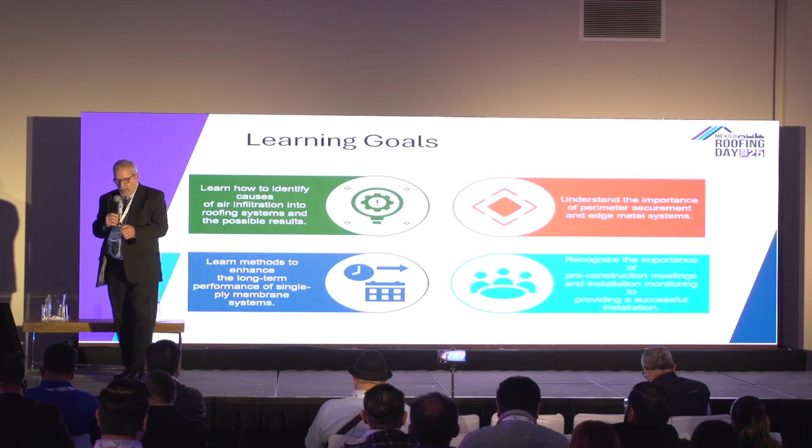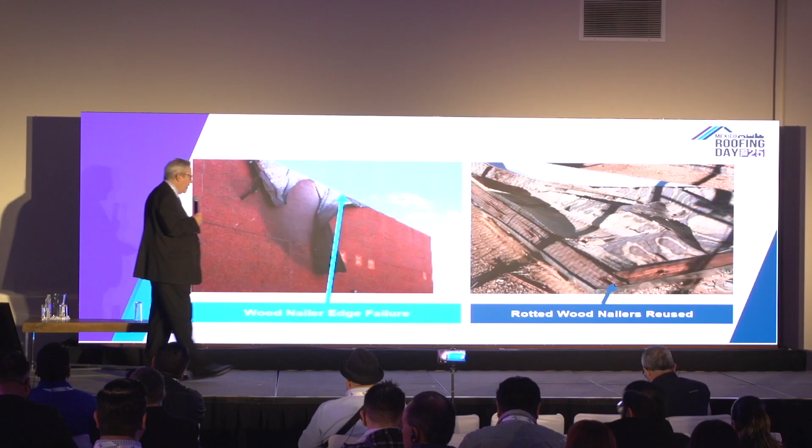Now, a lot of this stuff has already been talked about, but one of the things that actually keeps metalwork in place is the wood nailers, the ones we secure around the perimeter edge to make sure we don't end up having these kinds of issues.

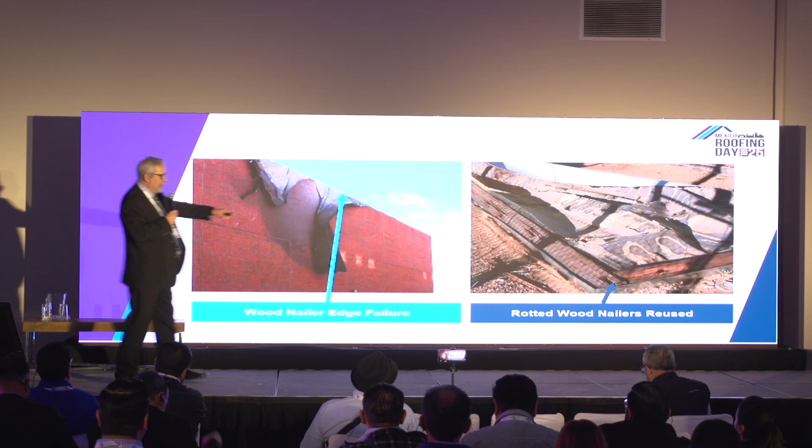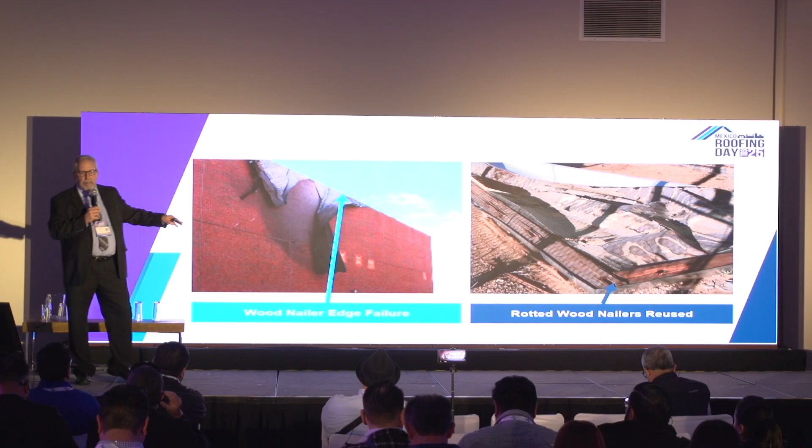They have to be investigated, especially in re-roof type applications. If the wood is rotted and has problems, it's not going to stay in place. If we reuse it, it has to be replaced with new to extend that durability. And the last thing we want is to have our roofing material look like a banner on the side of a building, waving in the wind to the customers and the people that go by. It doesn't tell a good story at all.

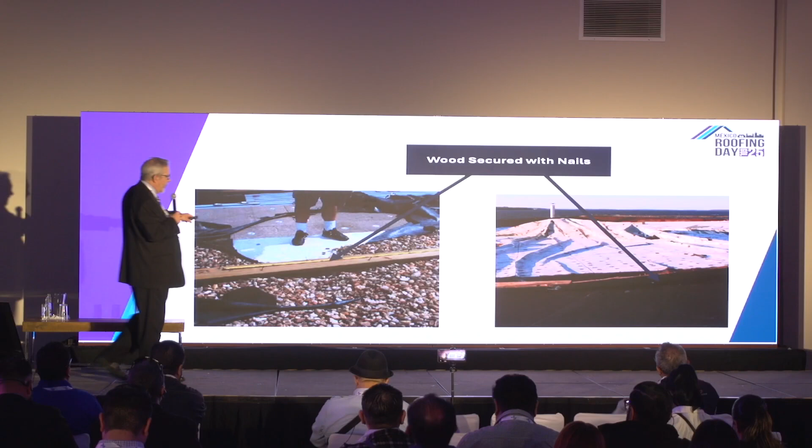There's some stuff like using nails instead of screws, and that's bad. Because nails go in really nicely, they go in straight, they go in fast. Unfortunately, it doesn't take a lot of work or effort to make those nails come back out—they come out just as easily. So when securing wood nailers, we need to make sure we're using screws to keep them tightly in place to withstand the wind resistance.

There's a document that's out there, and a lot of standards that can be used. This one is from FM—the Factory Mutual Property Loss Prevention Data Sheet 1-49. It gives directions on how to install wood nailers to make sure they stay in place for wind resistance, giving long-term durability. Right now in the industry, this is the strongest one being used. There are a couple of other ones that are minorly understood, but this is the primary one.

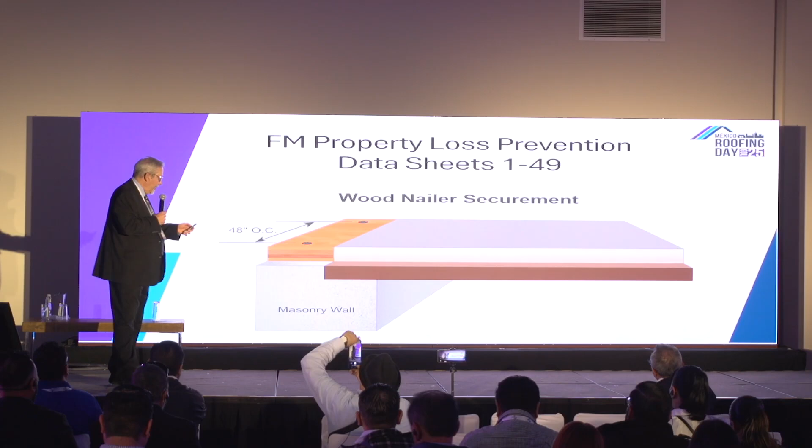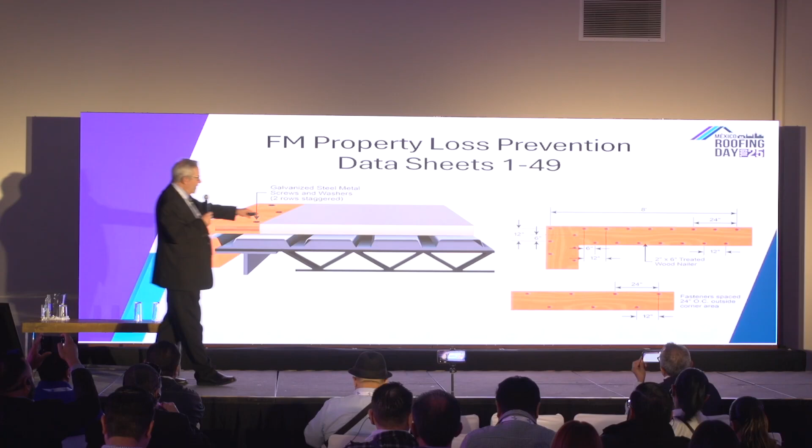This is for steel deck application. We're looking for 2 rows of fasteners staggered at 24 inches on center. But as we've discussed already in a couple of other presentations, wind resistance has different areas on a roof, such as the field, the perimeter, and the corners. So as fastening gets closer to the corners, they double the fasteners to compensate for the additional pressure in those corners to make sure they resist the wind.

So these are some of the things to keep in mind. Review the existing conditions, specify screws, and try to follow FM 1-49, or talk with your manufacturer or your consultant to make sure these are all correctly followed properly. Then the metal edging goes on.

Back in the US, we're finding that a building roof system costs about 10% of the whole building structure. And out of that 10% cost, only 1% of it is actually the metal edging that holds the roof system in place.

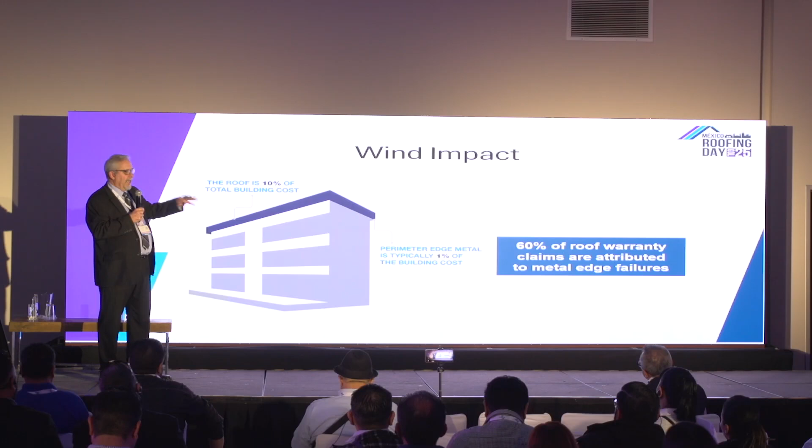60% of the litigations we have, and 60% of the warranty problems we have, is associated with wind and associated with the metal edging. So this is one of the biggest performance issues with roof systems, and it needs to be addressed to make sure it's installed correctly.

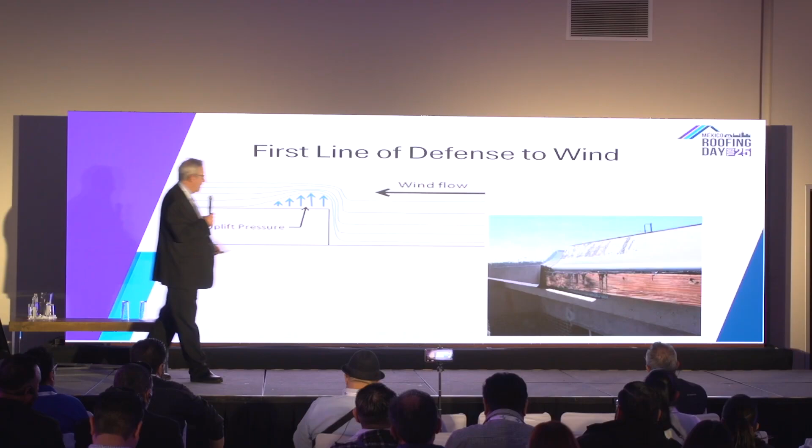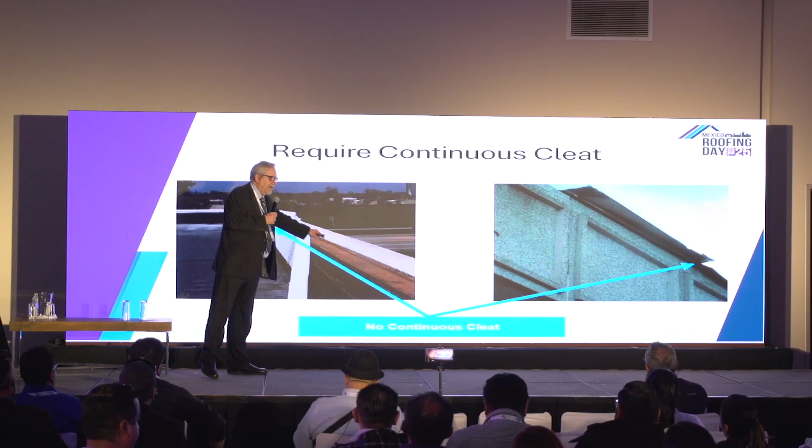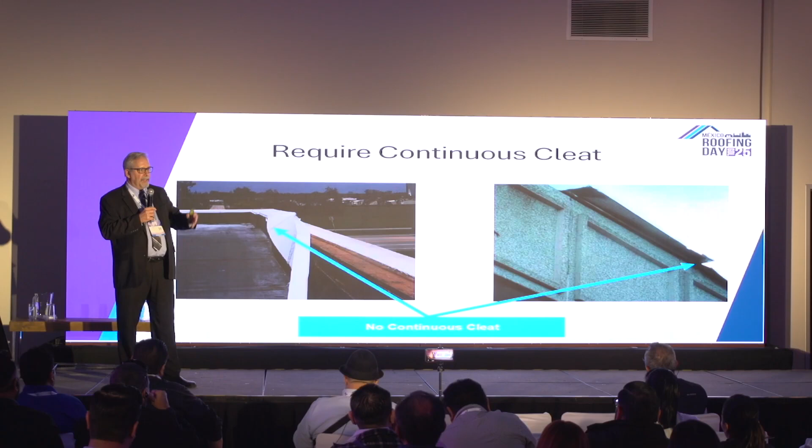These are some other conditions where they didn't use a continuous cleat. I do like to point out that this particular one has an EIFS or Dryvit type of material, which isn't really structural to start with. So that's another thing to look at when installing properly - make sure the materials are compatible and that there's actually a structural interface when using fasteners and screws.

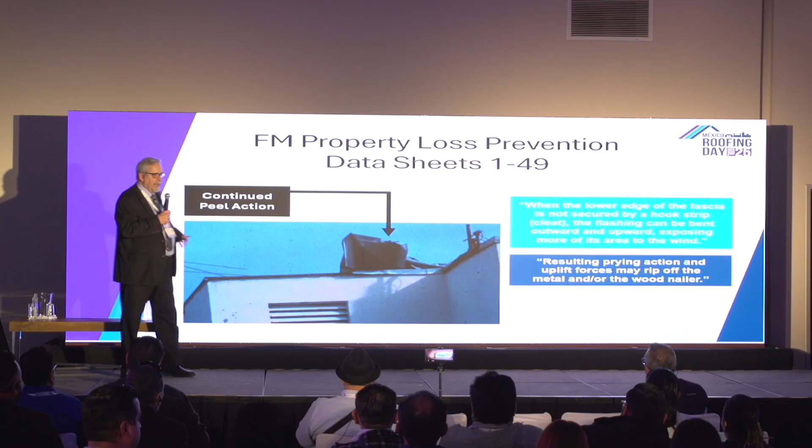In this case, the wind hit the fascia of the building, came upward, grabbed the metalwork, and started peeling it free. Best case scenario, the roof system starts to roll itself up, which makes it easier for tear-off during re-roofing. But that's not what you want.

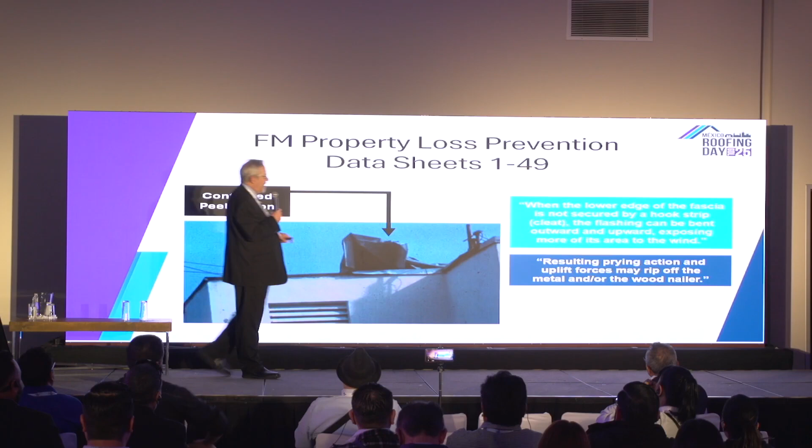These are some comments that came from Factory Mutual. When the lower edge of the fascia is not secured by a hook strip cleat, the flashing can be bent outward and upward, exposing more of its area to the wind's effect. The resulting prying action and uplift forces may rip off the metal and/or the wood nailers, possibly resulting in catastrophic roof failure.

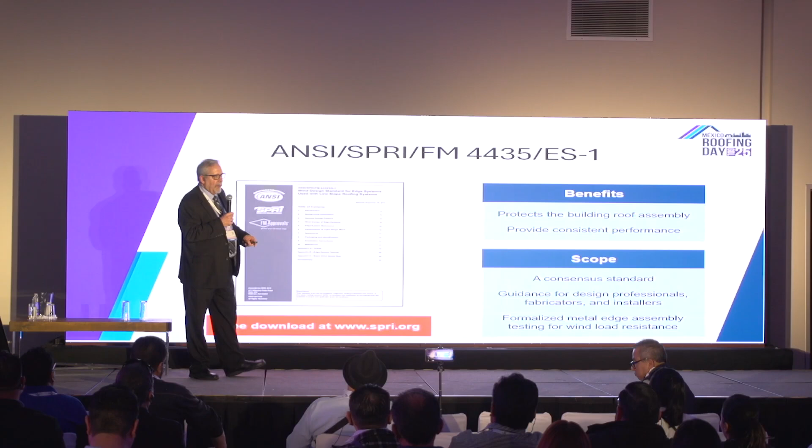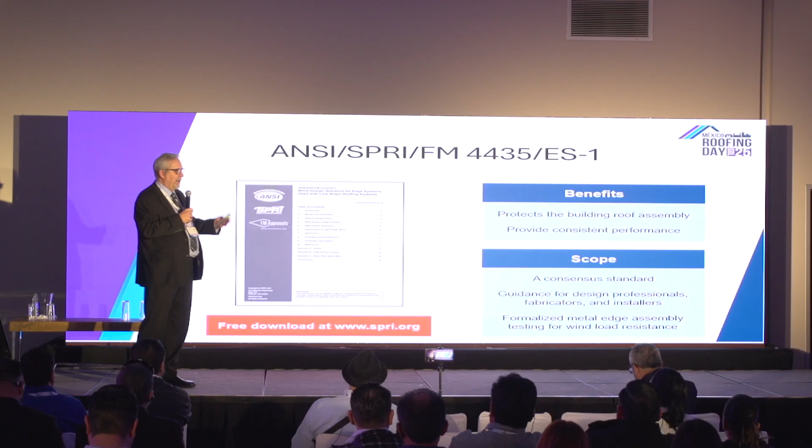To make sure the metalwork meets this criteria, there's a standard - ANSI/SPRI/FM 4435/ES-1, better known as just ES-1. In this document, we're now able to test metalwork to meet the associated pressures. This can be done with either prefabricated metalwork or shop-fabricated metalwork. The difficulty with shop-fabricated metalwork is that it needs to be trained properly - following the correct guidelines, bending it properly, correct gauge, and securing it the same way. So it all needs to be followed properly.

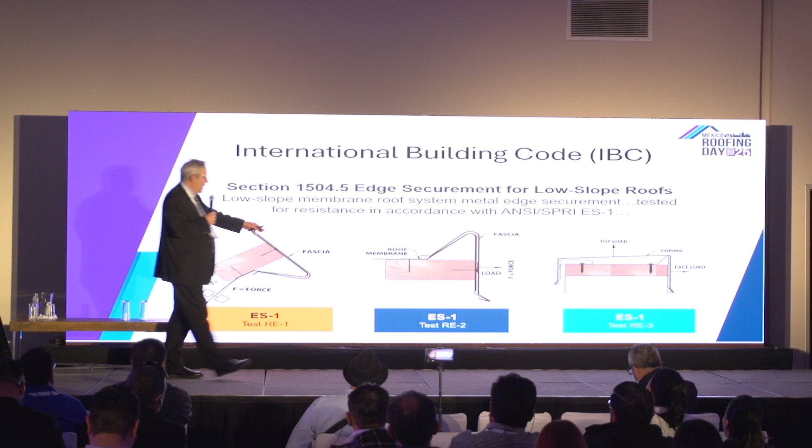This is the testing parameter we use, where we have RE1, RE2, and RE3. RE1 is used for mechanically fastened and ballasted systems because the membrane behind is loose. RE2 is usually used for all systems, where the force is pulled on it from the outside. RE3 is for coping caps.

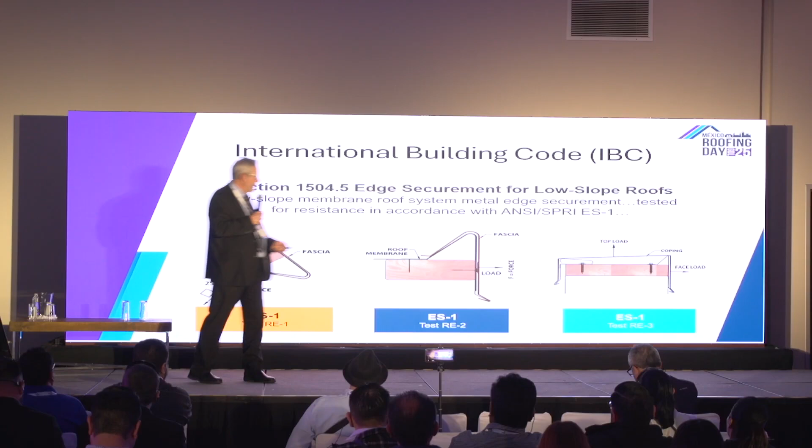I do apologize, I did not have time to convert this into metric, but you're all smart here - you're all kind of like engineers. I figured you could figure it out.

This is a pre-manufactured product that has already been tested in the laboratory. This one actually has 242 pounds per square foot, a significantly better uplift performance in this application, and it's easier for installation.

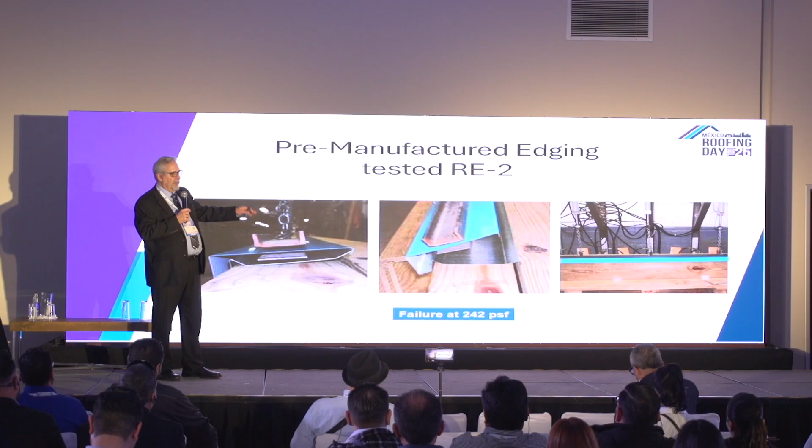The only training you have to do for your guys is basically show them how it's installed. Some additional benefits: you get high uplift, and the product is sustainable and reusable. These products can actually be taken off and then reused on the job again.

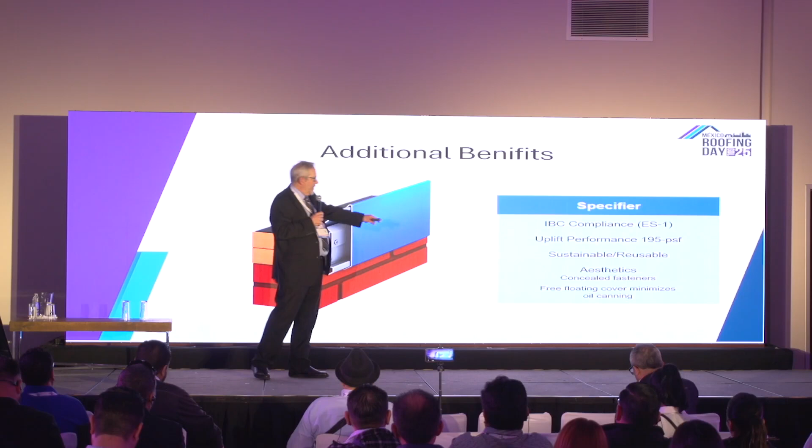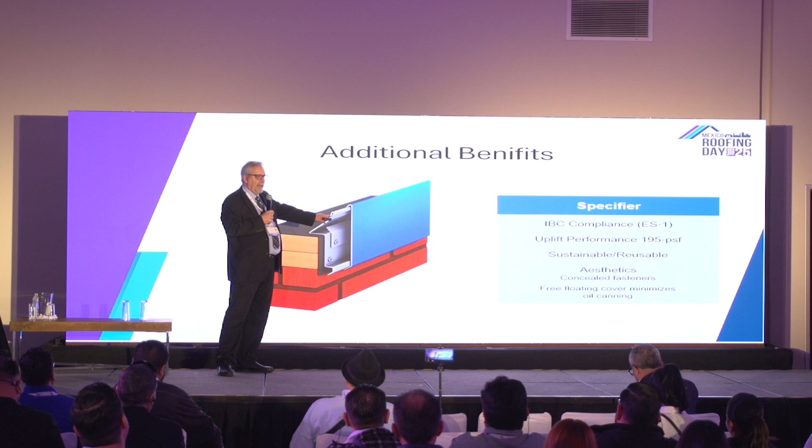I've also found a personal benefit where they have this fascia cover. It's separate from the actual waterproofing or watertight condition. So if a ladder hits this and damages it, it's easier to pop it off and replace it without ever having to affect any flashing material or the watertight integrity of the system.

So keep that in mind. Cost is a big deal. Replacing the roof is a big deal, and it doesn't cost very much to put in a proper metalwork that meets ES1, whether prefabricated or shop fabricated, meeting that criteria. The biggest thing is remembering that continuous cleat.

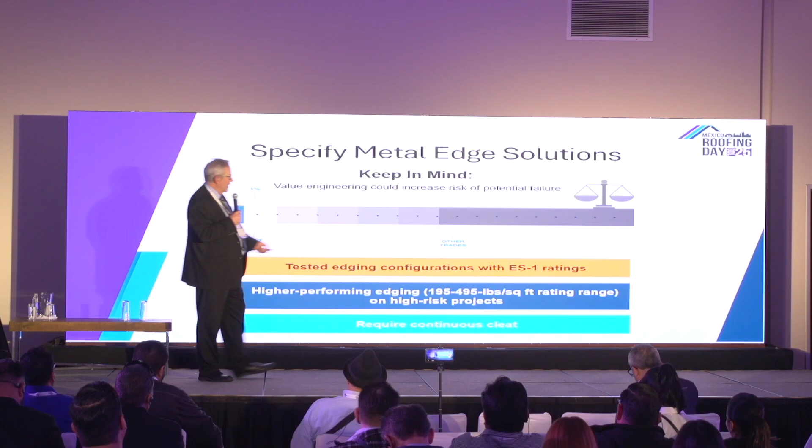Internal and external air pressure - a lot of what we deal with is external pressure, but internal pressure is often ignored because it's supposedly been addressed somehow in the engineering. Unfortunately, there are certain factors that come in that make the roofing system's performance unexpectedly ineffective.

This is just a bit of poor construction where there was actually an opening within the metalwork, so the wind just pumped right into the roof system, weakening its wind performance.

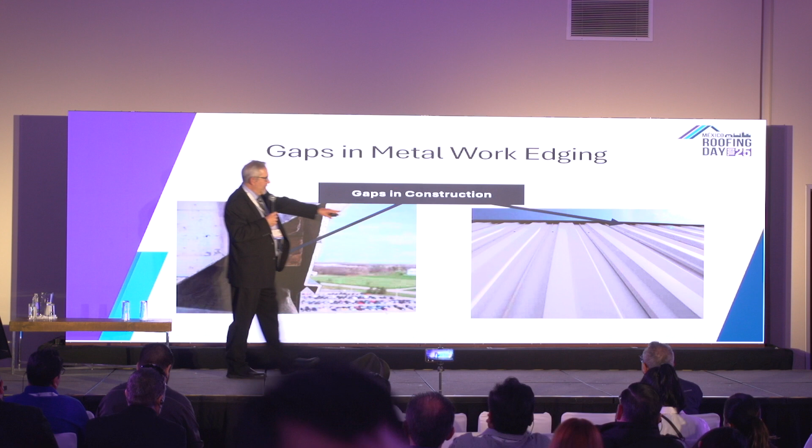In this case, there was a gap underneath because the corrugation of the metal wall went under this capping, and that air pressure moved itself in.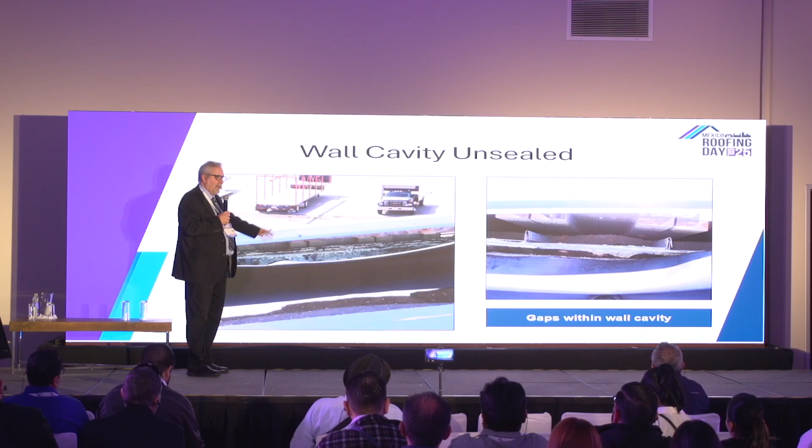In this design, this is a parapet wall, and below they did not seal this parapet open cavity, so all the hot, humid air from the interior of the building migrated into this wall, found a place to condense, and it caused rotting and mold problems where they started having issues.

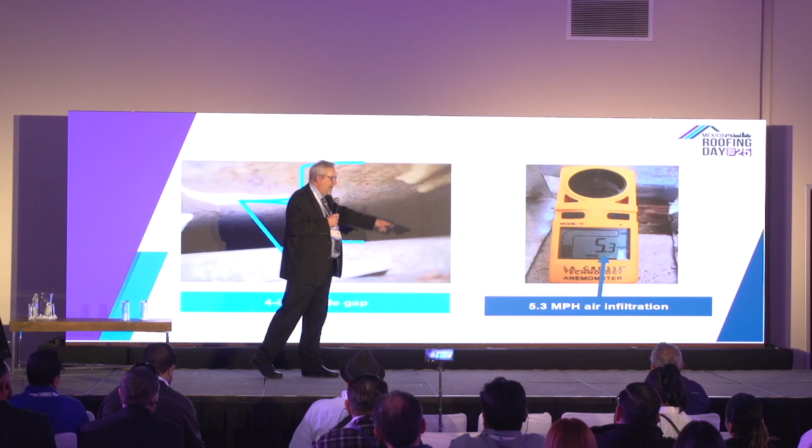This is just a close-up showing how big that gap actually is. Since they didn't seal it up, it allowed a lot of pressure to build up into it. This is a 4-inch wide gap, and they got 5.3 miles per hour wind coming from that - a significant amount of wind force being pumped directly into the roof assembly and weakening its performance long-term.

This one actually has an air barrier that failed, and that's the air pressure coming out from inside that building. Since it failed off that wall, and since this is the primary waterproofing membrane right along there, all that pressure went right into the roof system. Whatever was carrying it, whether hot humid air or just air pressure, it started to weaken the system.

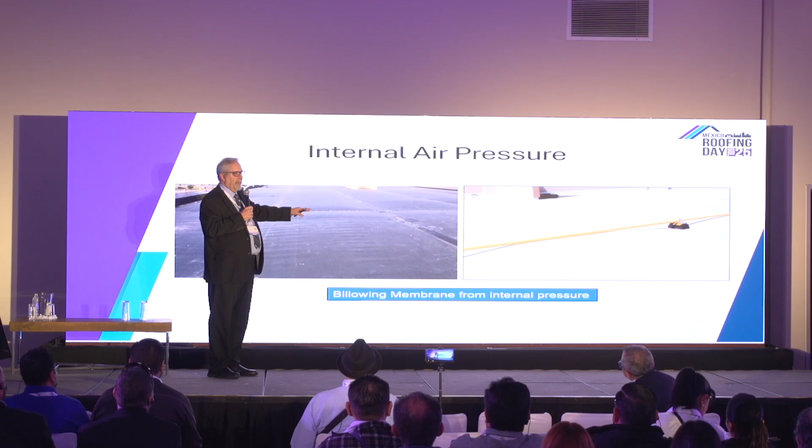And this is what it might look like. Very active HVAC units create internal pressure within the building, and since this is a mechanically fastened system, the membrane will continually billow with this kind of additional pressure. It's not going to weaken the rating associated with it, but it could fatigue the membrane long-term and cause problems. So we want to control that so we don't have that type of pressure.

There was a project I had in Philadelphia, Pennsylvania, where they had an adhered system - the membrane was adhered to the insulation, and the internal pressure was so great that the membrane popped off. They came back and tried to reapply the membrane, and it popped off again because the internal pressure was still so great the adhesives could not cure up.

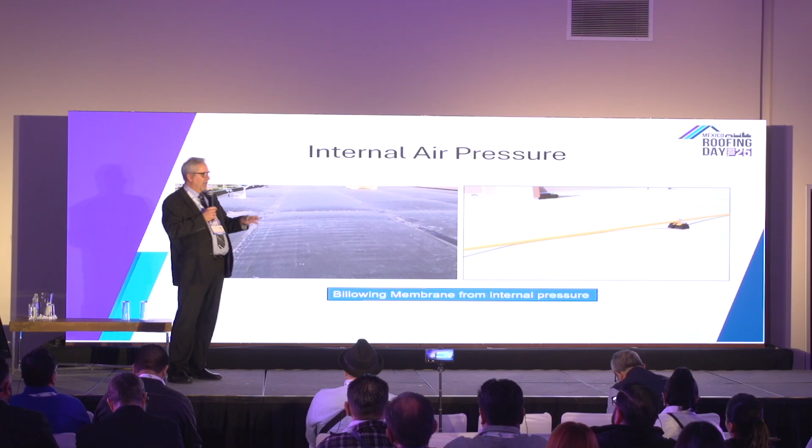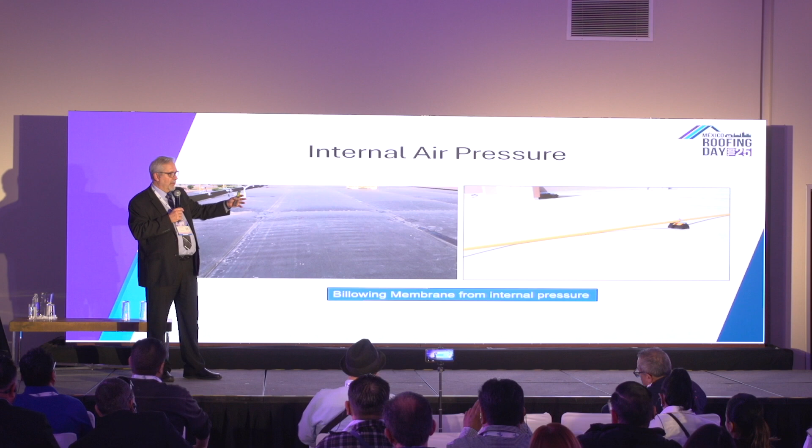They did a lot of searching and found out that this was a 60-story building, and all the air pressure was building up as it stacked throughout the building. When it got to that point, they found a hole that was actually pumping air into that space. Once they closed that off, they were able to finally repair the roof. But that took 6 months of investigation to find out.

So it's very important, if we're dealing with trying to minimize wind performance issues, to isolate the system from interior pressure. If it's unknown, it's always a good idea to seal the penetrations at the deck level and seal the joints between the deck and walls. That way, at least you're mitigating that much pressure from getting into the building.

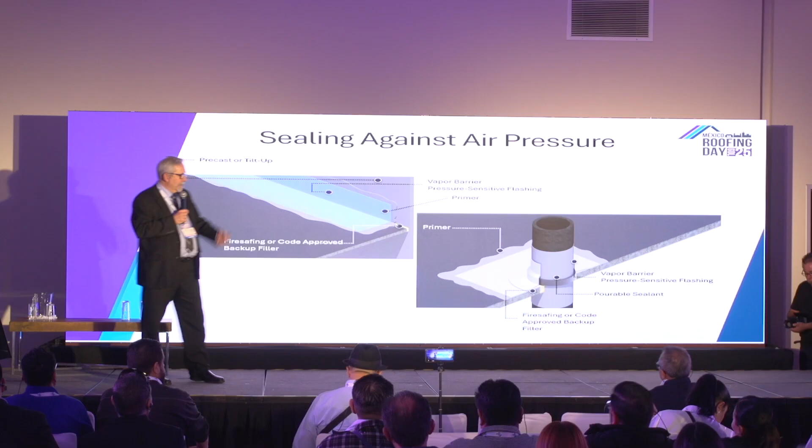Steel decks might be a bit harder to do than that, so you may have to use some kind of sheet good to basically seal it up, making sure that all that air pressure is caught inside the building and doesn't move into the system itself. So outside airflow must be sealed to avoid any problems. Sealing cavity walls on the interior and sealing the deck and penetrations are very important.

Standing seam metal roofs, or metal roofs in general, are very popular around here. So this is some of the things we've been seeing. There are a lot of different configurations of metal roofs and how they're used, from corrugation to fluted.

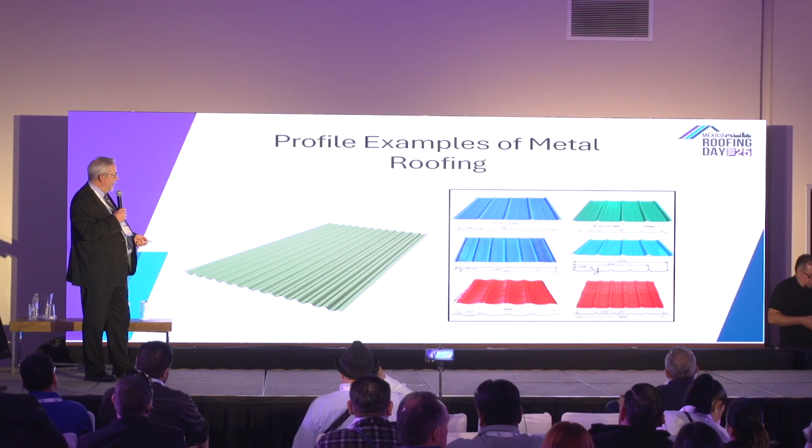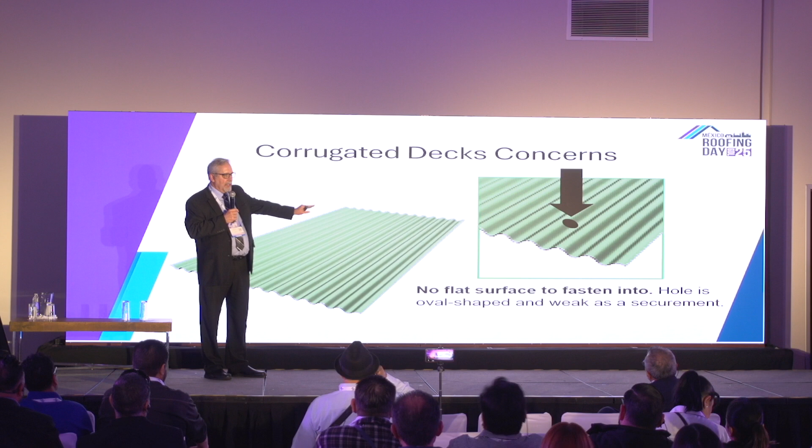The problem with corrugation is that I've had people actually try to install mechanically fastened systems directly over these things. What happens is, in the mechanically fastened system, the fasteners are designed to go perpendicular into the metal deck. When you have a curvature, you're not getting a circle, you're getting an oval, and the fastener isn't working properly. You could actually have a ratcheting effect where the fasteners will slowly back out. So it's not going to be a long-term performing system. You're going to have a very weak system long-term wise.

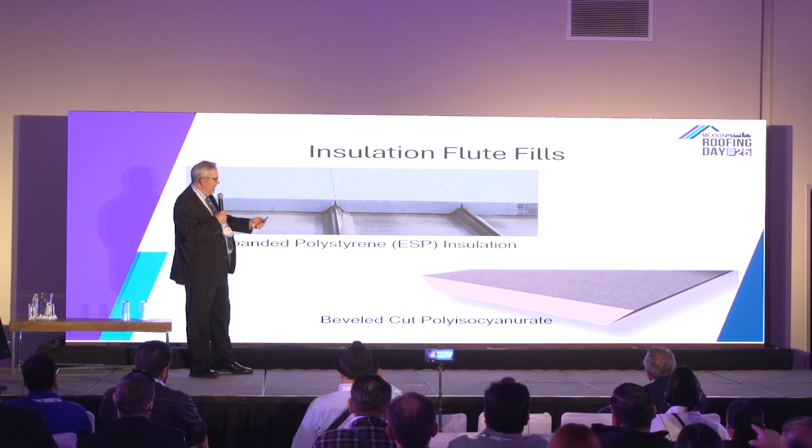For other systems with flutes, typically what we do is fill them up with insulation, and then put the system over the top of it. Manufacturers make bevel-cut products to be able to fit into them properly.

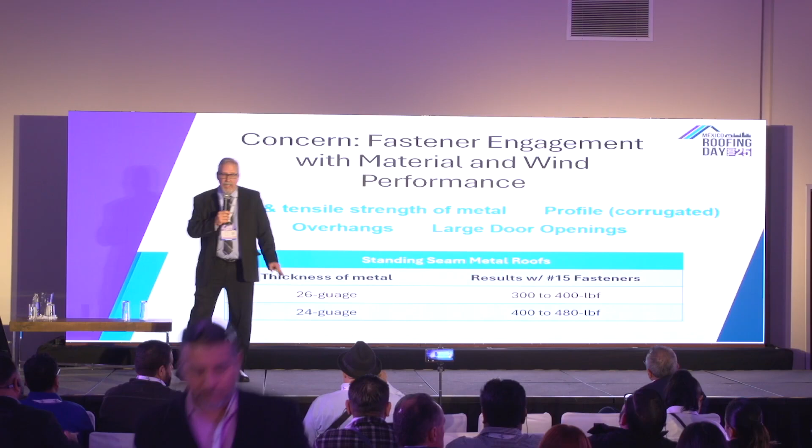When you're looking at fastener engagements, if you're trying to go right into the pan, they're usually 26 or 24 gauge, so they're very thin. Using a number 15 fastener, you typically only get 300 to 400 pound pull values out of the weaker materials, and these materials are not tested in laboratories. They could if they wanted to - there's actually a protocol within the design criteria for doing that - but manufacturers don't do that because they know it's going to fail. So they don't do it.

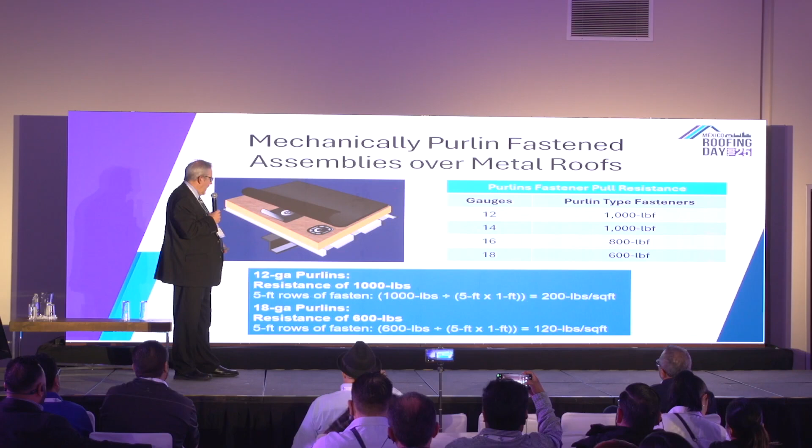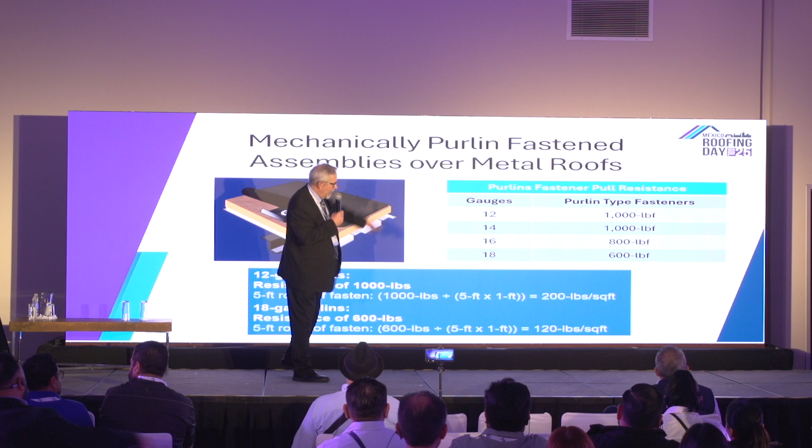Most of the designs offered are fastening into the purlins, and the purlin fastener engagement is very, very strong comparatively - you're getting anywhere from a 600 pound pull to a 1000 pound pull, and those fastenings come out to a significant performance characteristic of 200 pounds per square foot. So fastening into the structure versus the metal pan is going to give you the long-term performance that you want out of that system.

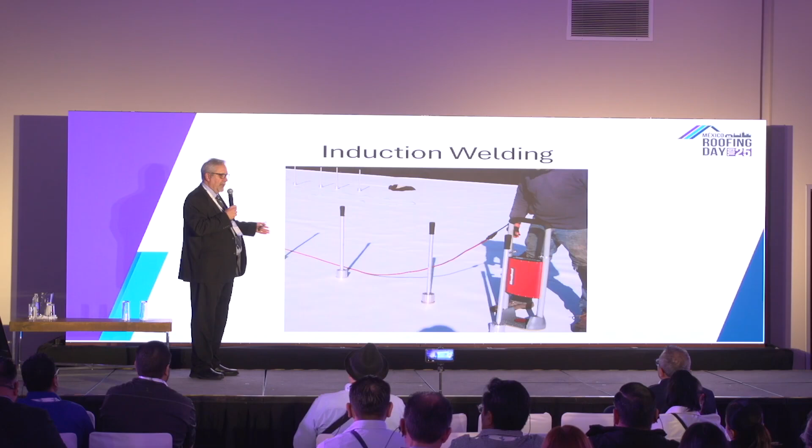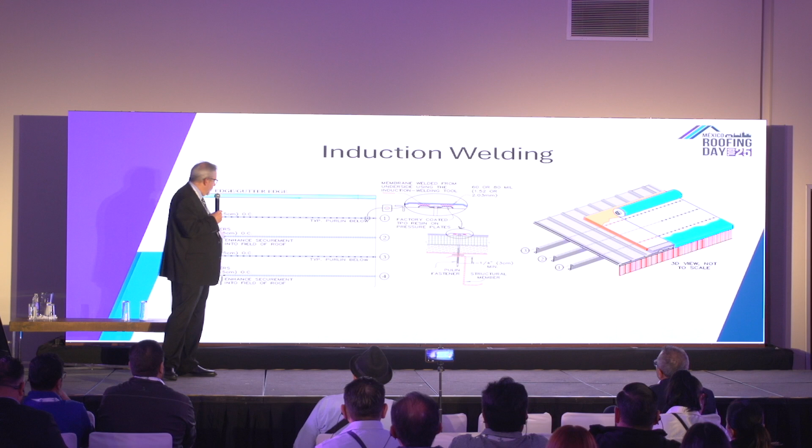There are other types of systems to make it even more convenient, like induction welded systems, where you can fasten the plates into the purlins and then heat weld the membrane directly to it. So you don't have to have custom made sheets - you can just use whatever large sheets the manufacturer offers, and just heat weld the seams accordingly. There are specifications on how to lay out the plates for perimeter areas, usually what we refer to as fingers coming in at the edges, which give you a way to make it a very aesthetically pleasing design.

Now there's a third way of doing it - you could do adhered systems, where we're actually fastening the insulation to the metal deck pan. Calculation-wise, it comes out reasonable, between 75 and 100 pounds per square foot, and then you can adhere the membrane. So you fill the flutes, put your insulation or cover board, fasten it down, and then put the membrane down with adhesive.

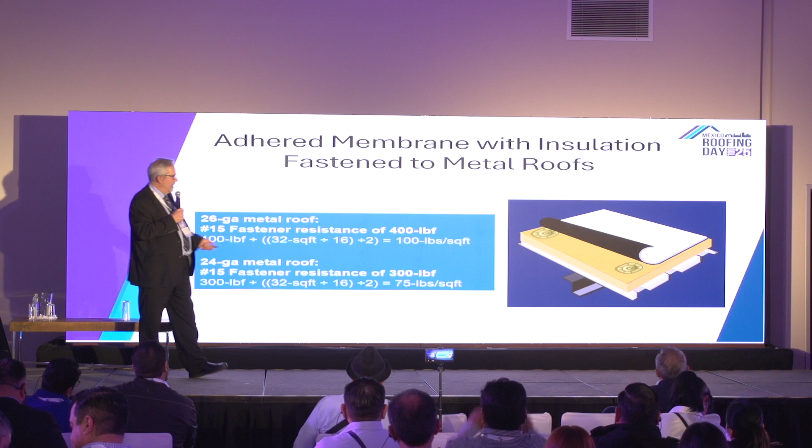There's also ribbon-type applications using 2-part urethane adhesives, where you can actually do a serpentine pattern in the pan and flute, fill up the insulation, continue the insulation with a cover board, and then put down your membrane system. No fasteners are used at that point.

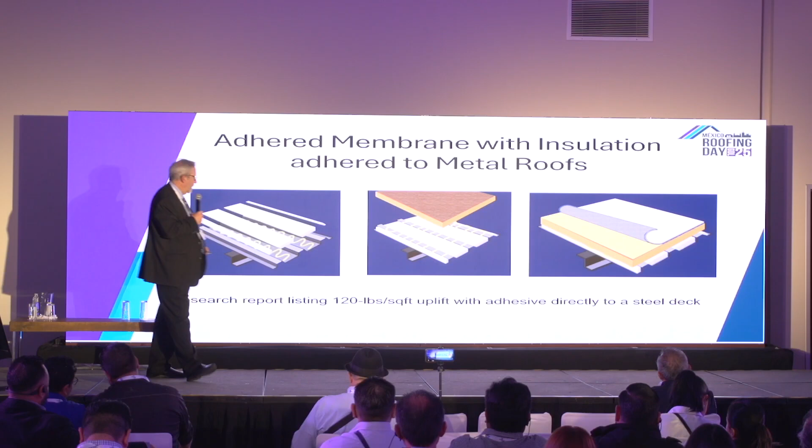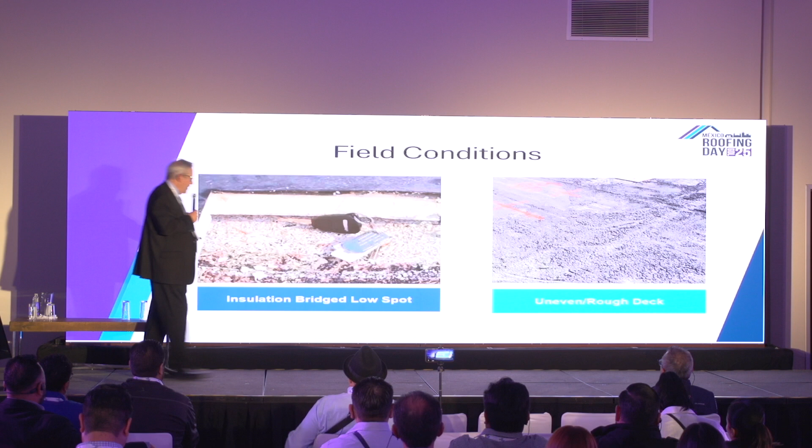Insulation adhesives lead us into this because we want to make sure we have correct surfaces to apply the 2-part urethane adhesive. This is a cementitious wood fiber board, but it was uneven, so the boards were not getting good engagement with the adhesive and gotten weakened attachment. Concrete is supposed to be smooth, but this is looking very rough and uneven also. Those are surfaces we do not want to use adhesives on.

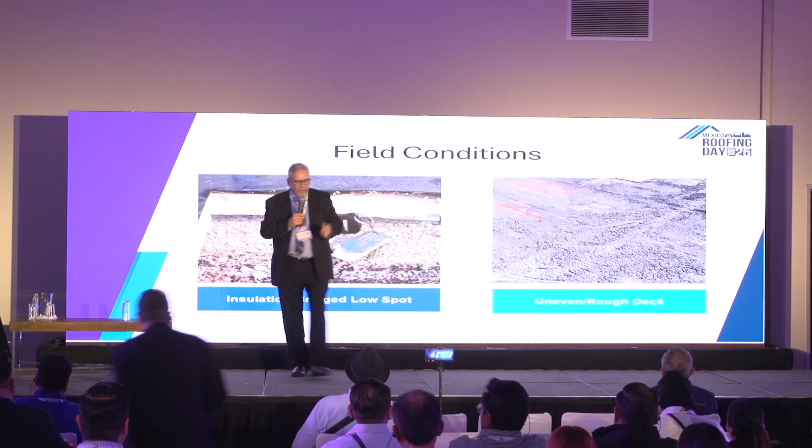In re-roofing applications where you have a modified or built-up roof, look at the surface and see what kind of condition the existing BUR is in. If it's questionable, we found that priming it with a primer prior to using the 2-part urethane adhesives gives you much better, significant performance. For instance, non-primed is only 60 pounds per square foot, while priming gets you 540 pounds per square foot. So significantly better performance for a long-term system.

Application concerns: don't wait so long to put the boards in. There is a time limit that needs to be followed. Letting it cure out completely, the boards will not stick. Make sure we have enough even coverage of the adhesive. Using half the amount of adhesive is not going to give you half the performance, it's going to give you far less than that.

People have asked us, well, you guys are manufacturers, you always put belt and suspenders into the designs you're specifying for us to put down. That was true 30 years ago. The industry has gotten extremely competitive. There is no more belt and suspenders that any manufacturer uses within their specifications. You have to follow what we write and the coverage rates to make sure that the system goes down properly and will stay in place.

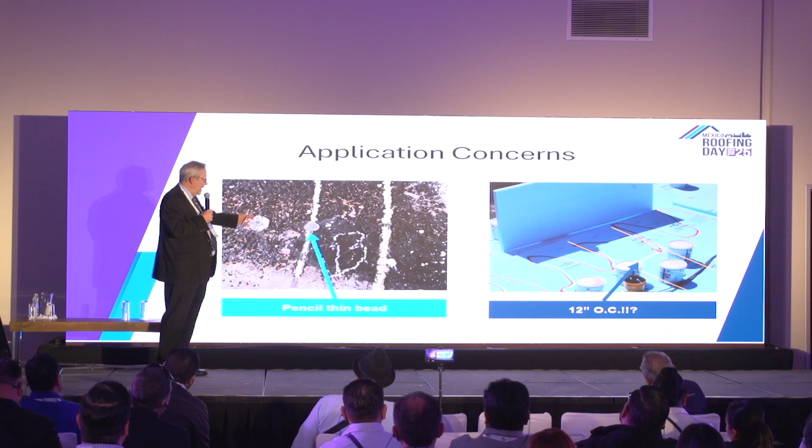This is a chance to show that ribbon width is very important. We specify that, and it needs to be followed. By putting in just a thin pencil line, you're not going to get long-term performance. Basically we say maximum spacing of 6 inches on center. This one is definitely much larger than that and shouldn't be used.

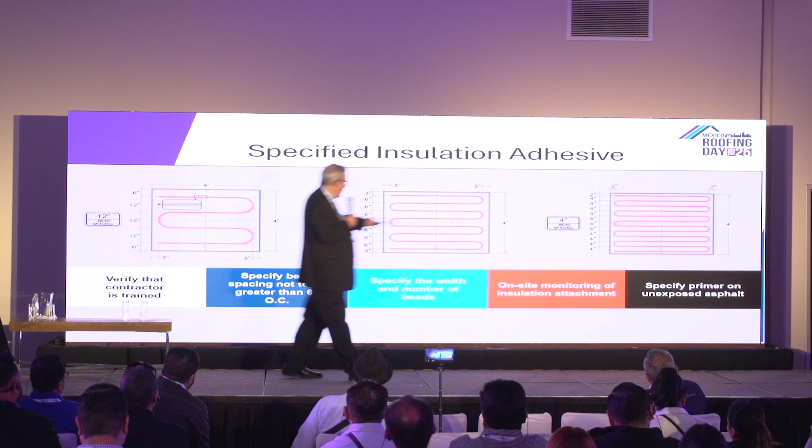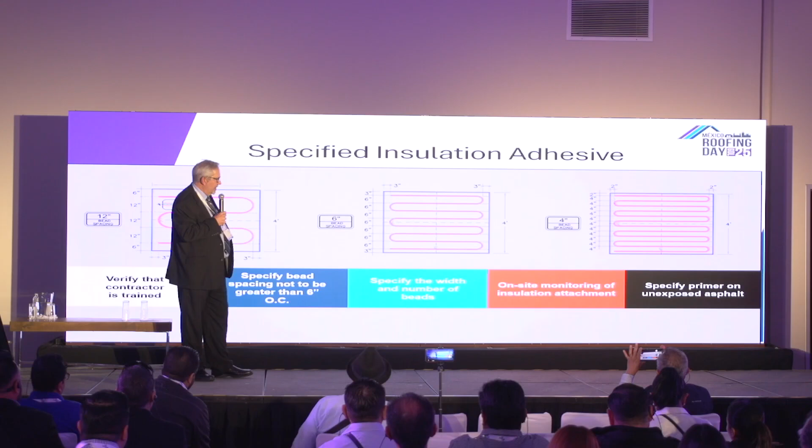These are the patterns you would typically see, between 12, 6, and 4. There are other odd ones that could be used depending upon whose standard you're following. These are some of the things you need to keep in mind when trying to install the roof properly.

Bonding adhesive coverage rate is also important. Typically for application, we see roller type products with solvents, and there are also cylinder type applications where they can spray it down. They let it sit for a minute so you get the correct tackiness, and then they put the two products together.

This is a very advanced technology application system where we take the can of adhesive, mix it up, put it on its side, punch a bunch of holes on the side of it, and it drips onto a piece of carpeting that you pull behind you. As simple as that sounds, the adhesive comes out fast to begin with, so the applicator has to move fairly quickly. But as the adhesive starts to slow up, it gets thinner and thinner, so they need to back roll this—they can't just rely upon it.

This was actually that type of application where they ended up having very poor application, and the wind took it and started taking the roof off. They reported this as being 50%, but I think it's a lot less than that. This is what we can see, and it's not going to last—it doesn't take much wind to actually make that fall off.

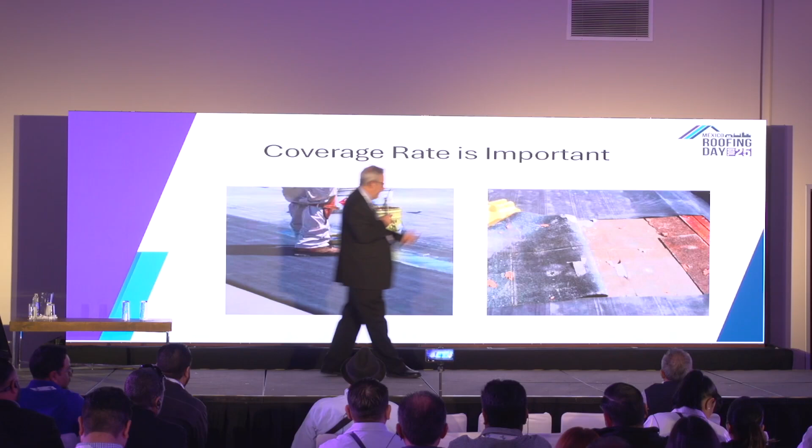So these are some key pieces to consider. Specify back rolling when you see that particular product being used. Avoid porous type substrate materials and low VOC materials, which is very popular in the States. There may be a need for more time for flash off if that's been specified.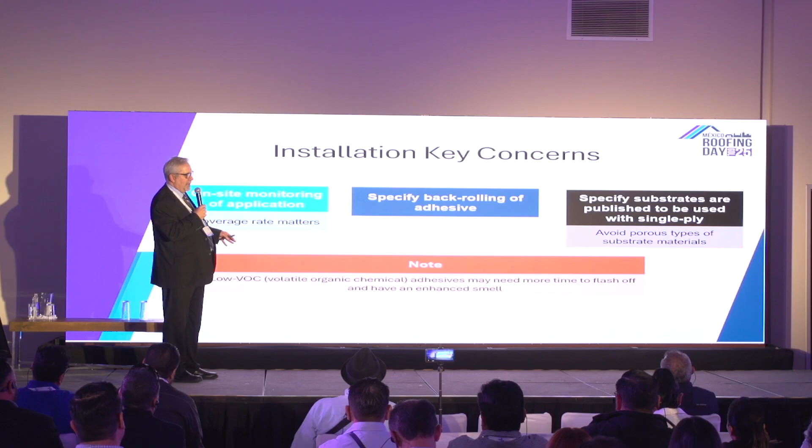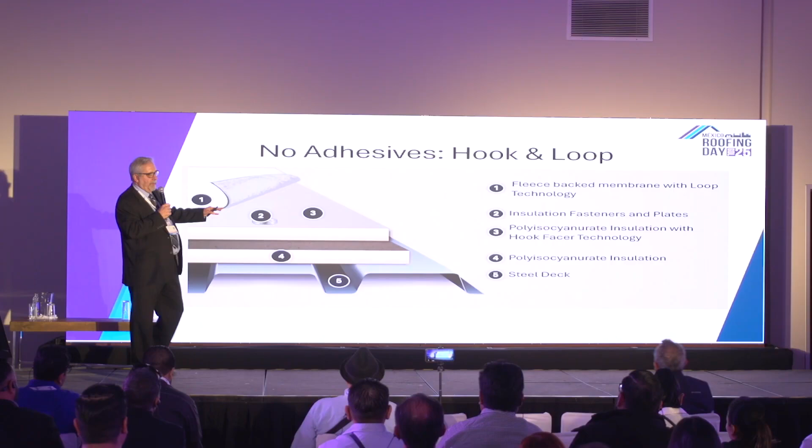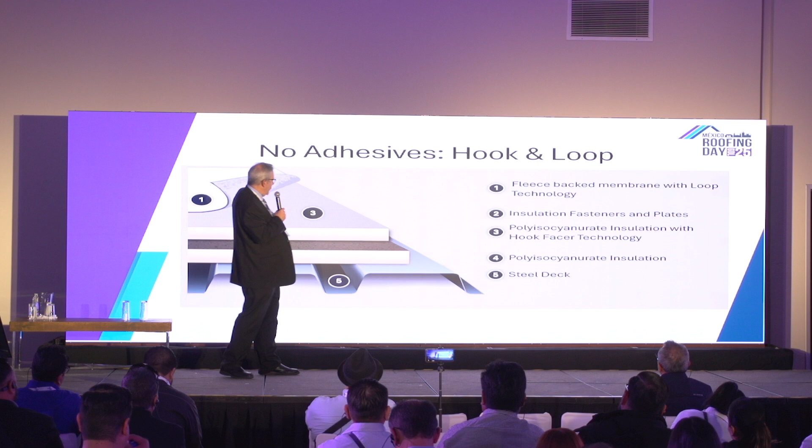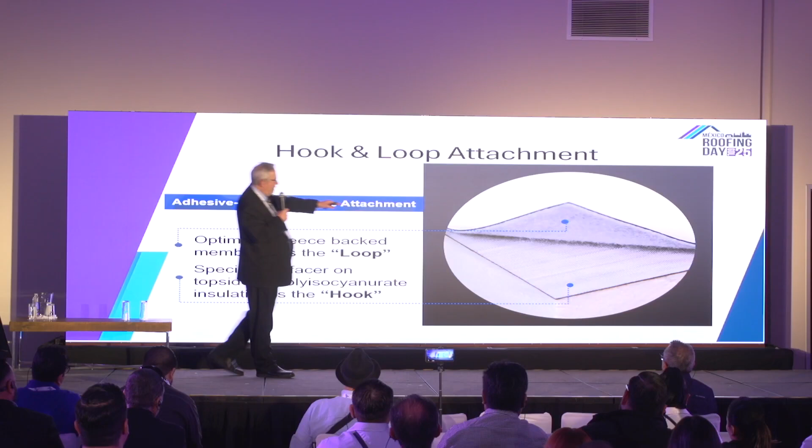Some of the advanced technologies, if you don't want to even deal with adhesives, include this hook and loop kind of product. They reference it as being like Velcro, where the substrate has the hooks in the facer, and the loops are in the membrane. You basically fasten this down or adhere it down, and then you go ahead and roll the special membrane into it, and you get very, very good performance.

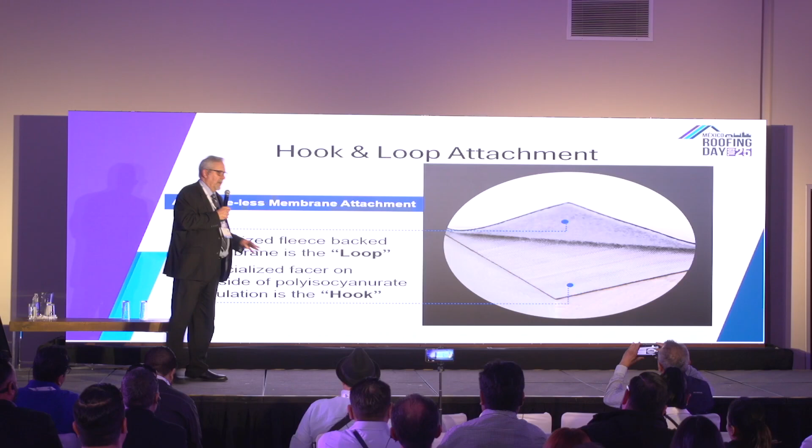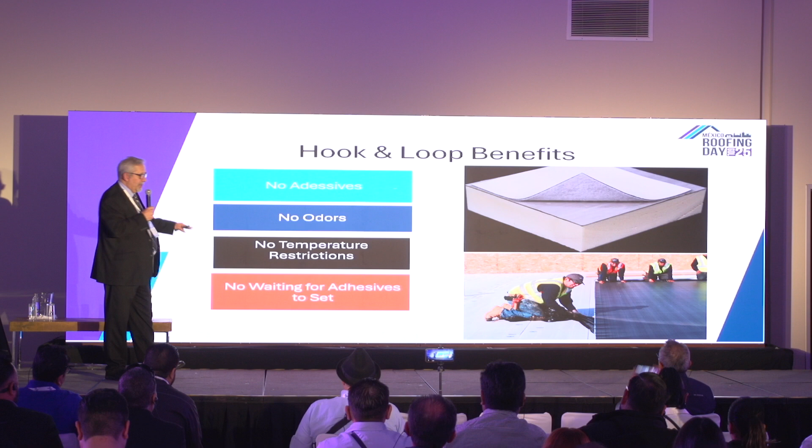No adhesives. This works really nicely on operating buildings where a building owner is concerned about smells—if it's a hospital, those kinds of configurations where you may need to avoid those things. So no adhesives, no odor, no temperature restrictions, and no waiting for adhesives to flash off.

Last section, sheathing boards. This is something I've been seeing used quite a bit, where they use the sheathing board that's on the exterior for siding or the wall, and then on the back of the parapet they use the same board.

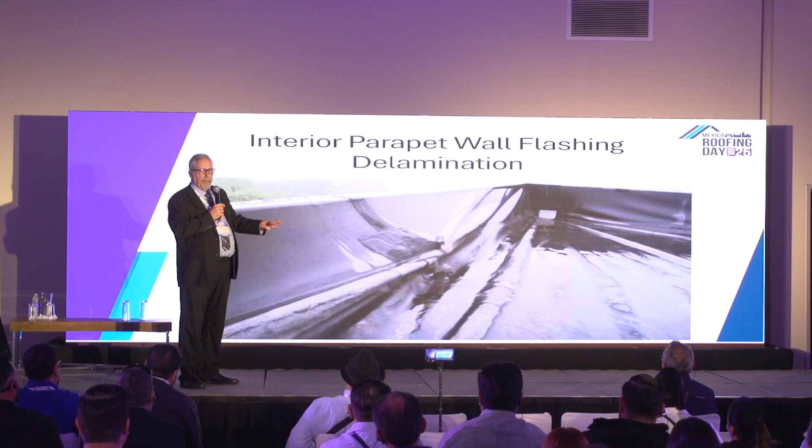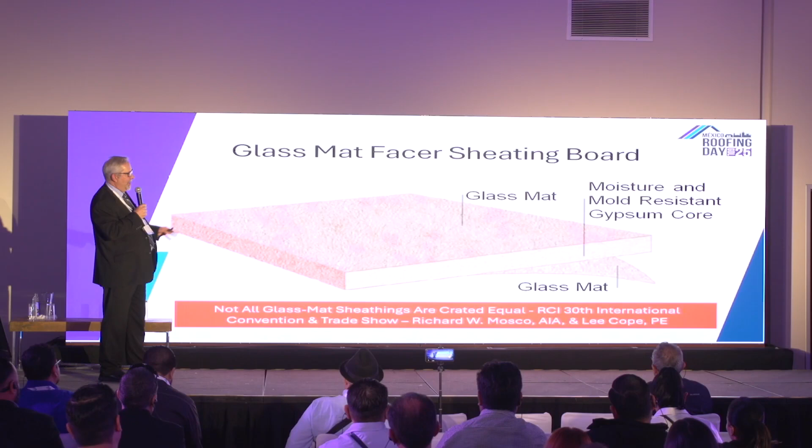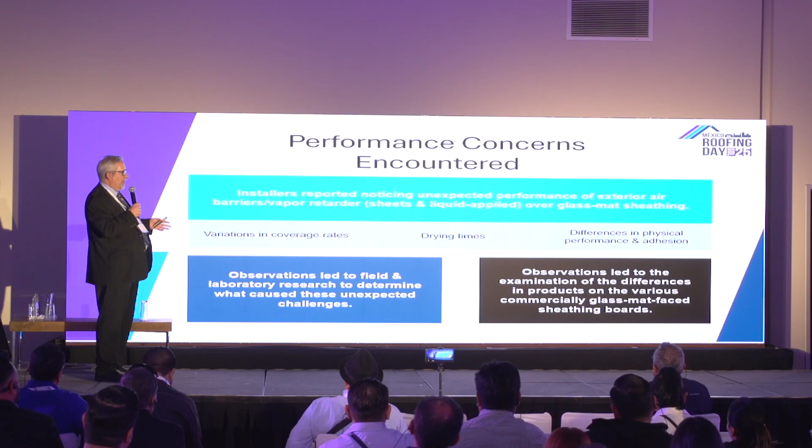This was a study actually done and presented at RCI, now IIBEC, where they had glass-faced sheathing boards and were having problems with them. Installers were reporting unexpected performance for exterior air barriers and vapor retarders. Basically, the product was coming free.

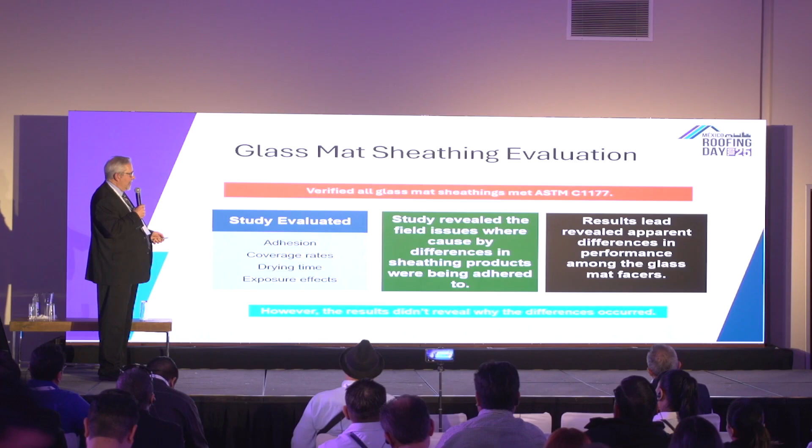They were trying to do all this analysis to determine what was causing that problem. They looked at it very closely and verified that all the boards meet the ASTM criteria for each of the boards. But the facers were what they eventually boiled down to, finding issues associated with application of the adhesives or primers. So they went even further, looking at some of the sheet goods under magnification of 50 times, and went as far as 100 times to see what might be causing those application issues.

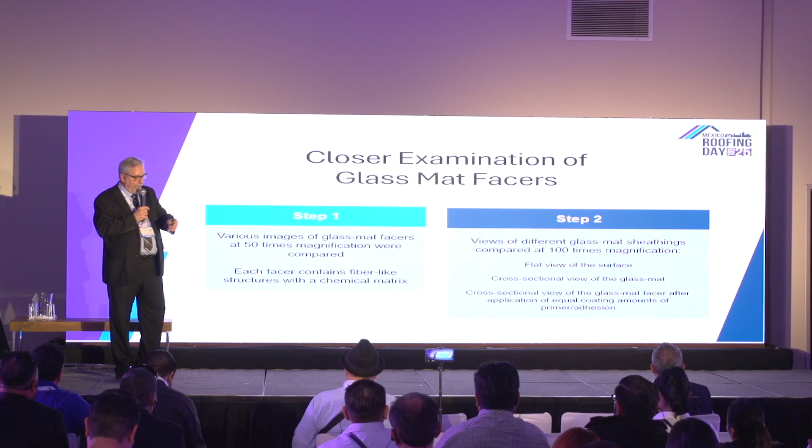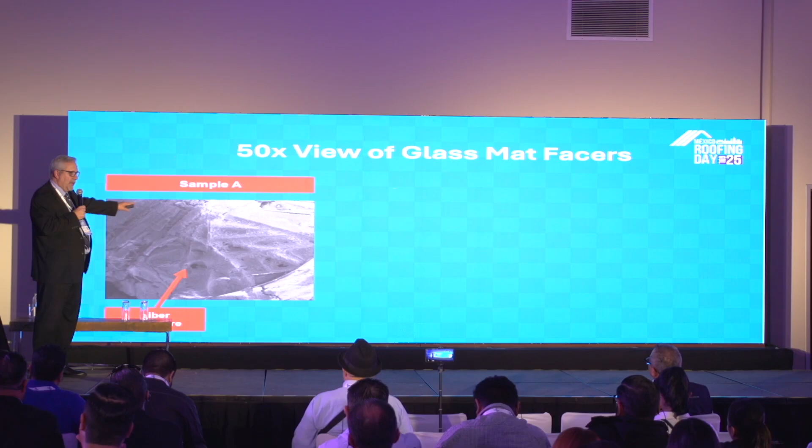Just to give you an idea what they were looking at, this is sample A, and this is what they refer to as the fiber matrix, which is all those kind of fibers you slightly see in there. Then they have the chemical matrix, which is all the stuff they put in it to glue or cover that all together. That's how they make a sheet of a facer for a product.

Sample B, you see a lot of chemical matrix, and you don't see much fiber at all. Sample C, you see a lot of fibers, almost no chemical matrix. So that's the kind of differences they started to notice during this investigation, that these products were significantly different.

So what they found out is that to use these specific products, you'd have to know how much adhesive or primer you'd have to use, and that would fall on the manufacturer to verify how much would be necessary to make sure the sheet goods stay applied to it.

Now, for roofing material on the back of the parapets, even though we've been seeing this, we've always stated to use roofing boards - the same boards we used on the surface of the roof system to adhere to - and we've tested this in the laboratory. Those boards should be used on the parapet wall. If you see a sheathing board used for the exterior on the interior, that board needs to be overlaid. It's very important, because the flashing will eventually fall off.